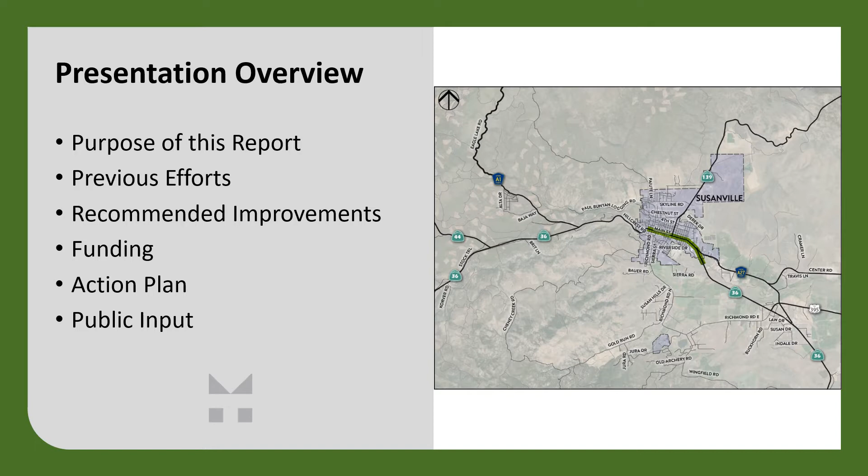This virtual presentation has been prepared to summarize our efforts to date and direct you towards opportunities to comment on the recommendations presented. In this video, we will talk about why this report is being prepared, previous planning efforts for the Main Street corridor, recommended projects which will improve safety and mobility on Main Street, potential funding sources to implement these improvements, an action plan, and how you can provide input.

State Route 36 acts as Main Street through the city of Susanville. Main Street is an auto-centric four-lane roadway which has remained largely unchanged since the 1970s. Over the past few years, multiple pedestrian fatalities have occurred in the corridor. This report is a first step in the process required to make improvements to the transportation infrastructure along Main Street, which will increase safety for all users, particularly pedestrians.

The objective of this report is to provide City of Susanville staff with a list of recommended projects. The report also provides a framework for city staff to work in coordination with Caltrans to implement these projects. In addition to increasing safety, the recommended projects will increase the attractiveness of the corridor and thereby help encourage economic investment. Lastly, the report outlines potential grant funding sources which could pay for the recommended improvements.

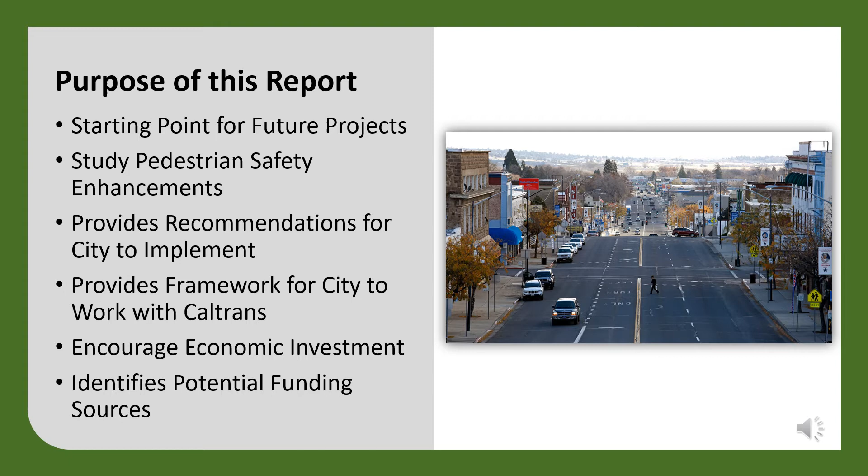Over the years, other planning efforts to improve conditions on Main Street have been conducted. These include the Susanville Main Street Revitalization Plan, the Lassen County Bicycle Master Plan, the recently completed SR 36 Capital Preventive Maintenance Project, which included repaving and upgrading curb ramps to ADA specifications, and considerations for restriping a short section of Main Street in Uptown, which was met with mixed opinions. Obtaining funding has been a significant challenge to completing improvements identified in these previous planning efforts.

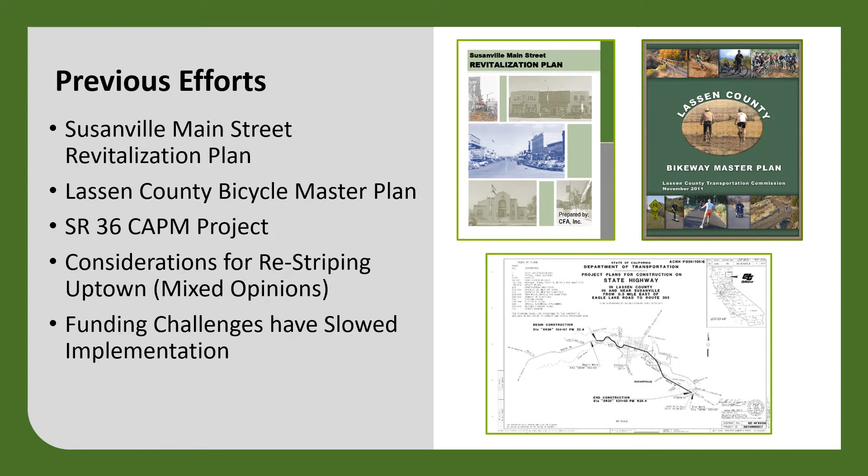This report builds on ideas and recommendations from these previous planning efforts and includes new elements which will make the report more usable for the city of Susanville. The new elements included in this report are a detailed safety analysis conducted by traffic engineers. The analysis identified areas with high crash rates and recommended safety countermeasures or projects designed to decrease crash rates in the future. In an effort to make the project recommendations more implementable, this report divides the projects into segments based on what type of grant funding the project qualifies for.

Let's talk about the improvements recommended in the report. A variety of concepts have been proposed, including a gateway feature, pedestrian level street lighting, urban greening, pedestrian safety enhancements, concrete banding, sidewalk repair, transit stop upgrades, and uptown restriping. The following slides will look at each of these concepts more closely.

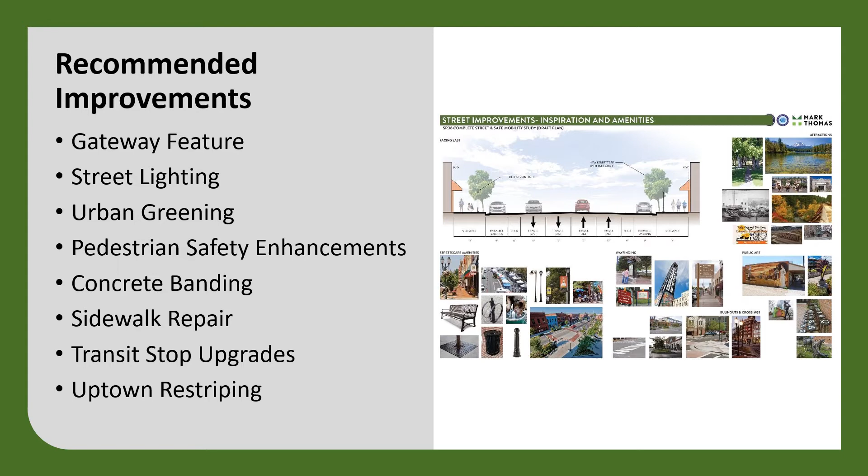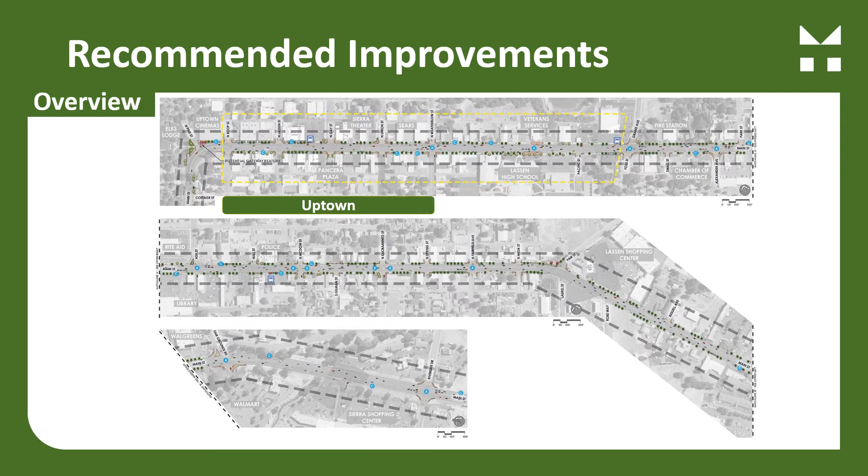This is an overview of all the recommended improvements. The report discusses improvements for three distinct districts along Main Street: Uptown, from Roop Street to Weatherlow, Midtown, from Weatherlow to Mesa, and the Gateway District, from Mesa to Riverside Drive.

A gateway monument is a structure or sign which communicates the name of the city. A gateway monument creates a sense that the traveler has arrived at a destination. It also serves as a safety countermeasure, as drivers will typically reduce speed when they notice they are entering a populated area. A gateway monument is proposed near the Pine Street Plaza at Uptown Curve.

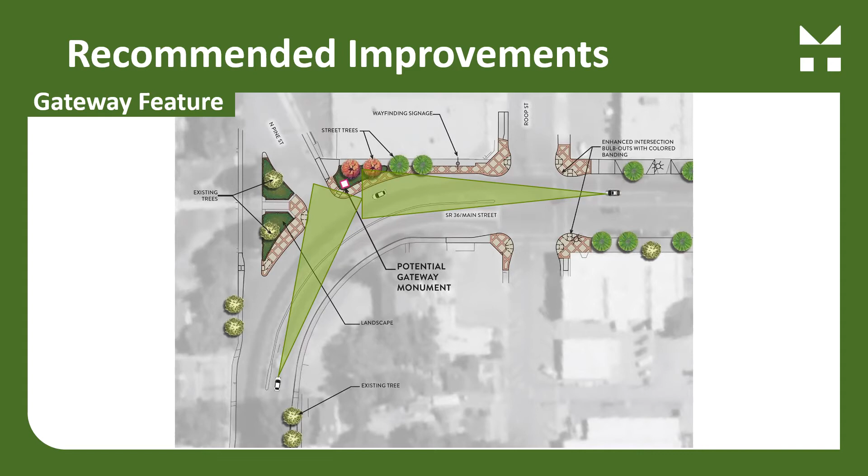The report recommends increased and enhanced street lighting to increase walkability in downtown Susanville. This includes light fixtures which are closer together and cast more light on crosswalks. Lighting fixtures and poles would be modernized and replaced with aesthetically enhanced fixtures that are less costly to maintain than the currently aging fixtures.

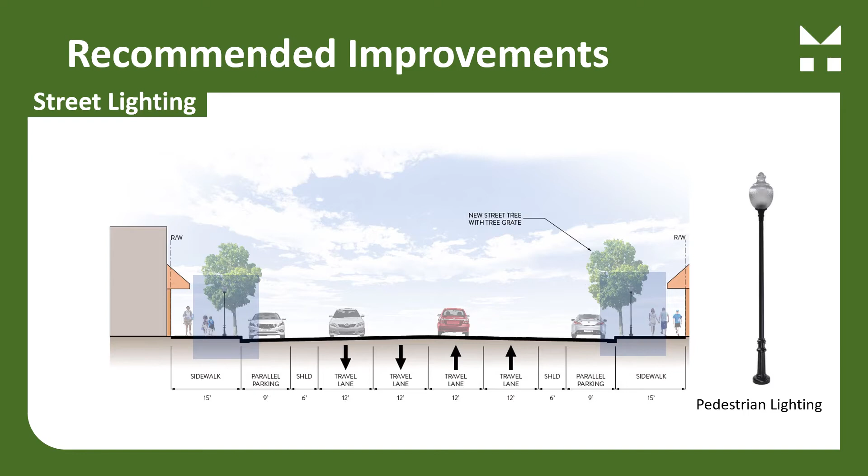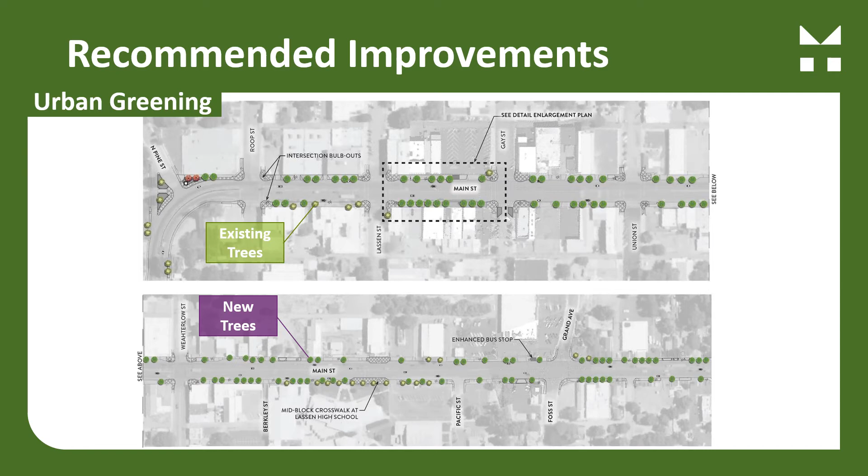Urban greening is public landscaping that creates mutually beneficial relationships between city dwellers and their environment. In Susanville, urban greening could include planting street trees or other landscaping and irrigation along Main Street. These features have been shown to provide traffic calming as vehicle speeds tend to reduce when the surrounding environment has been developed to a pedestrian scale.

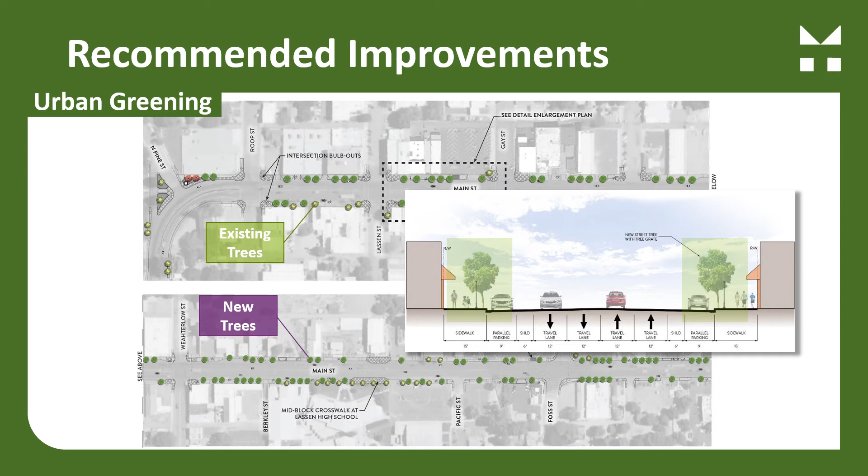The Main Street corridor is very wide, which creates long crossings for pedestrians. Currently, there are no safety refuge areas for pedestrians once they leave the sidewalk and start crossing the street. The recently constructed bulb outs do not shorten the crossing distance for pedestrians. Therefore, raised pedestrian islands in the median of the roadway are recommended at McDowell, Sacramento, and Gilman Streets. This will allow pedestrians to cross the roadway more easily by pausing in the protected pedestrian island before proceeding to cross the rest of the roadway.

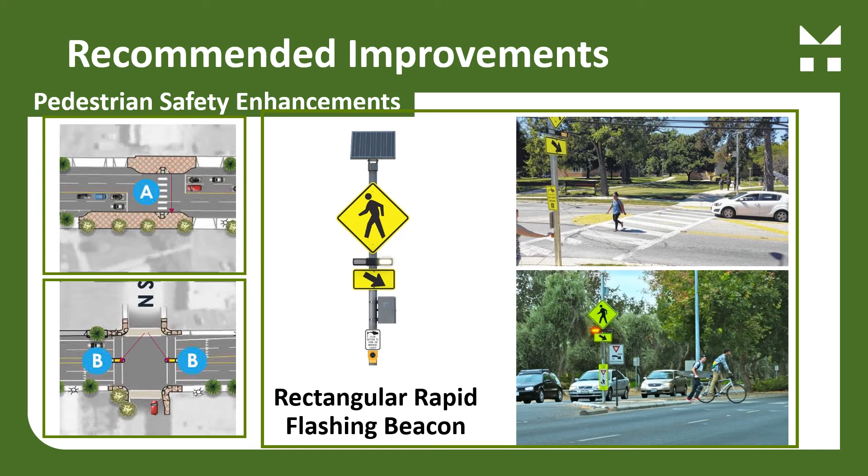Rectangular rapid flashing beacons, also known as RRFBs, are proposed at McDowell Street and Sacramento Street. These flashing yellow signals are warning beacons that pedestrians can activate by pressing the button. RRFBs are best suited for mid-block crossings and for crossings that are spaced far from a nearby traffic signal.

Roughly 10% of the sidewalks along this corridor are distressed or have cracks. Sidewalk restoration and maintenance will improve travel and safety for pedestrians and disabled persons utilizing the corridor. Sidewalk rehabilitation is proposed as part of the recommendations.

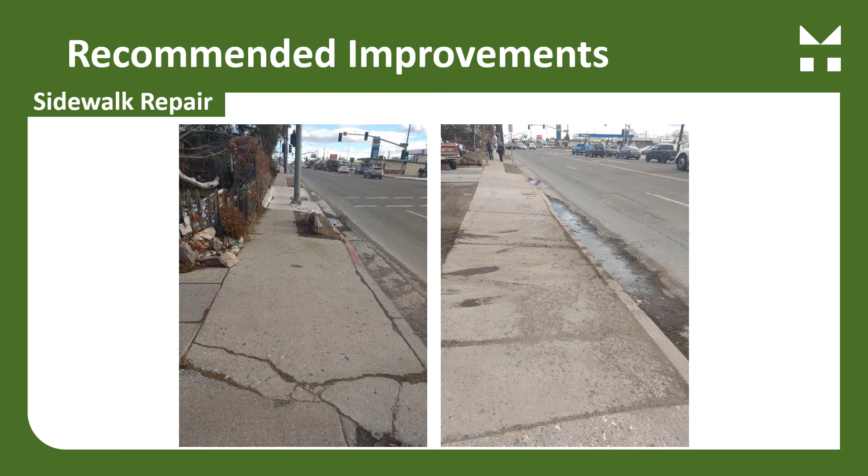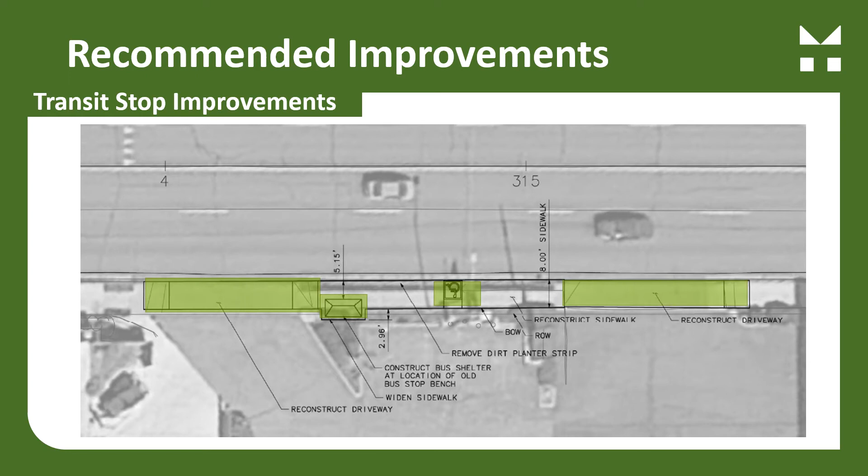Lassen Rural Bus currently has 7 stops throughout the planned corridor, most of which lack a bench or shelter. Transit stops should offer shelters with benches, lighting, and be ADA accessible for the comfort and safety of riders. Enhanced transit stops, such as the ones shown in this graphic, are proposed along the Main Street corridor.

One relatively inexpensive safety countermeasure is to restripe the short section of Main Street in Uptown between Roop Street and Weatherlow. Under this option, the number of travel lanes would be reduced from 4 to 2, and a continuous 2-way left turn lane would be provided in the center of the roadway. This would allow additional space for potential bike lanes or parking, as well as provide a number of safety benefits.

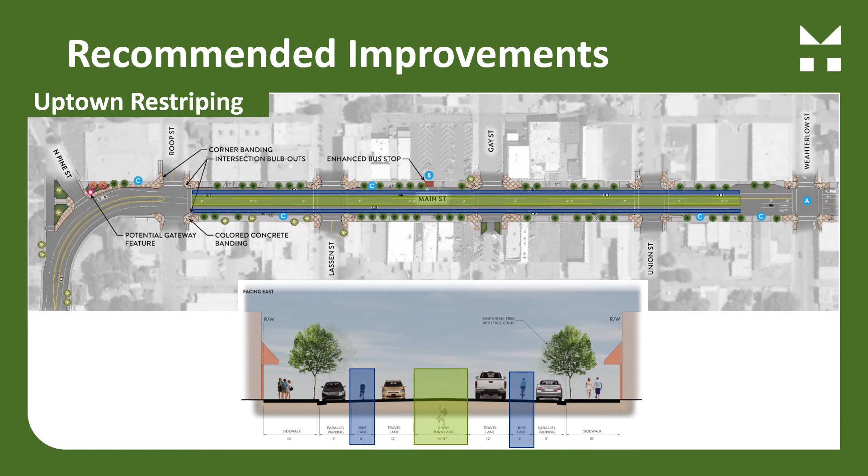Pedestrians would have fewer lanes of traffic to cross. Motorists would not speed up as the highway opens up from 1 lane to 2 after Uptown Hill. Pedestrians crossing at Roop Street can better anticipate the path of cars coming around the curve. And rear-end collisions would be reduced as there would be a separate lane for motorists to turn left.

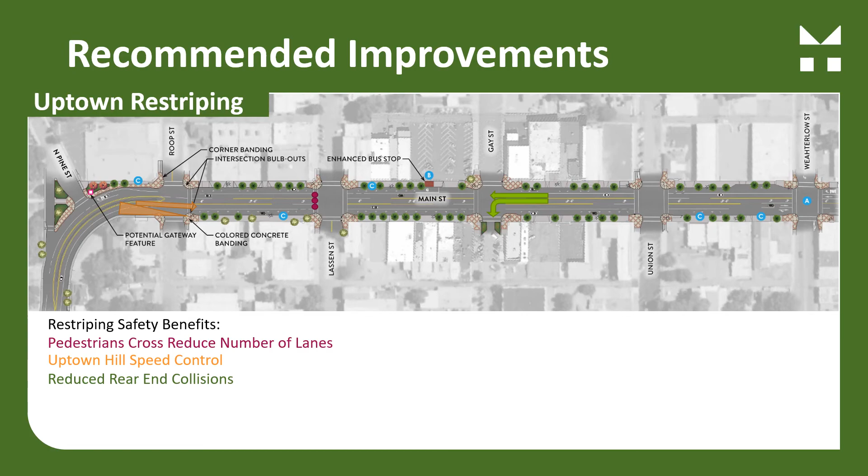Who pays for these improvements? Local and regional agencies can apply for a variety of federal and state competitive grants or allocate recurring transportation funding sources. Improvements designed to reduce crashes and increase safety are eligible for the Highway Safety Improvement Program. Bicycle and pedestrian improvement projects are eligible for funding under the Active Transportation Program. The Community Development Block Grant is available to fund landscaping, irrigation, and enhanced paving at the corners.

Urban Greening Grant funds projects that increase non-motorized access to community destinations concurrently with improving water quality and stormwater management, as well as the planting of shade trees. Recurring transportation funding for the state highway could also be allocated to the design and construction of sidewalks, bulb outs, crosswalks, pedestrian actuated crossings, bicycle facilities, pavement rehabilitations, landscaping, street trees, and traffic signals.

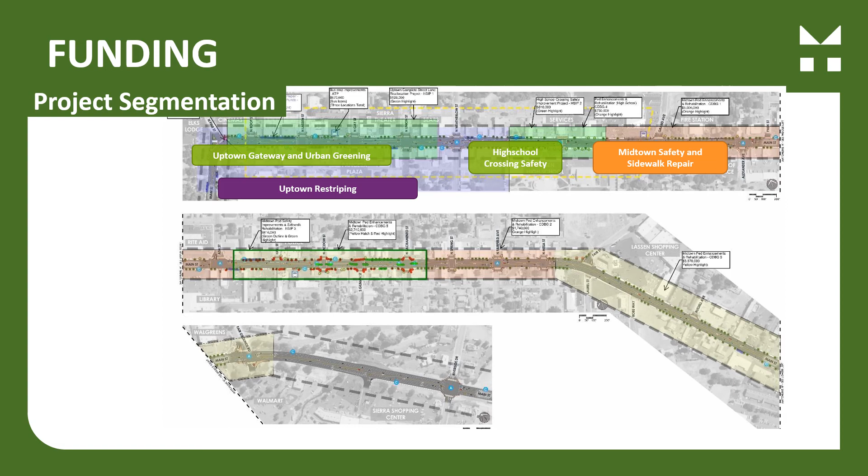Recommendations in this report have been segmented into phases. Each phase has a unique purpose and is intended to complete the corridor without rework. The phased projects have also been separated to best align with the requirements under the various available grant programs. The different segments include Uptown Gateway and Urban Greening, Uptown Restriping, High School Crossing Safety, Midtown Safety and Sidewalk Repair, and 3 Midtown Pedestrian Enhancement segments.

In total, all recommended improvements would cost in the order of $16 million. This is a large number, but the improvements can be implemented in segments over time. Many of the segments will cost less than $1 million each, making it more realistic to be funded either with state or federal grants.